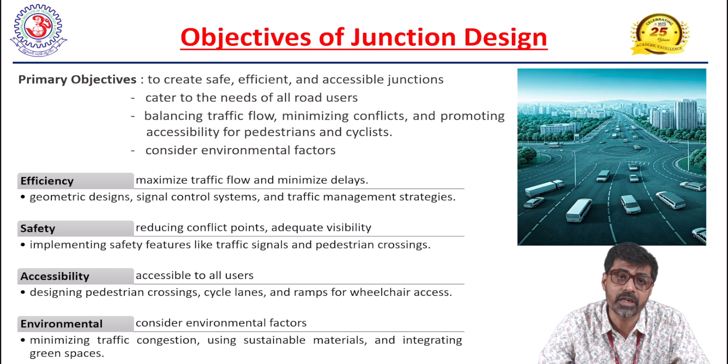And further, environmental consideration, where the design of the junction considers environmental factors such as minimization of traffic congestion, so that it leads to minimization of pollution emissions from vehicles, using suitable, sustainable material, and integration of green spaces within the road infrastructure. So these all help in achieving environmental sustainability while designing the overall road system.

Moving further, what are the different types of junctions? Junctions can be classified on the basis of grade, whether grade separated or at grade. It depends on whether we are separating the directional movements of vehicles at the same level or at various different levels.

At-grade junctions are where all roads intersect at the same level. That means all the directional vehicular movements are merging or meeting at a point at the same level, whereas grade-separated junctions involve an overpass or underpass to separate traffic at different levels. So here we are separating the traffic coming from different directions and going to different directions.

So what are the examples of at-grade junctions? At-grade junctions are crossroads, T-junctions, Y-junctions, and roundabouts. Whereas grade-separated junctions are divided into two components, which are flyovers and interchanges.

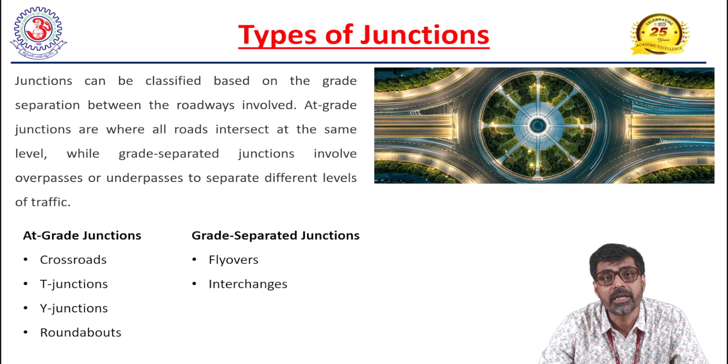Moving ahead, what is the junction design process? How can we design the junction? It involves various key steps, which start from data collection, then analyzing the data to understand the traffic pattern, which leads us to the geometric design and implementing appropriate safety features.

So it starts with the traffic survey and analysis, where we collect data through traffic volume studies, speed studies, traffic composition studies, and turning movement studies, and then analyze all this data to understand the existing traffic scenario on the site. Through this, we predict for the future, estimating what the traffic scenario will be. That helps us in decision making.

The second step is the selection of junction type. Once we analyze and understand the current scenario and the scenario in the upcoming future, we decide the junction type: which junction design we can implement on ground for the purpose of catering to the expected traffic flow.

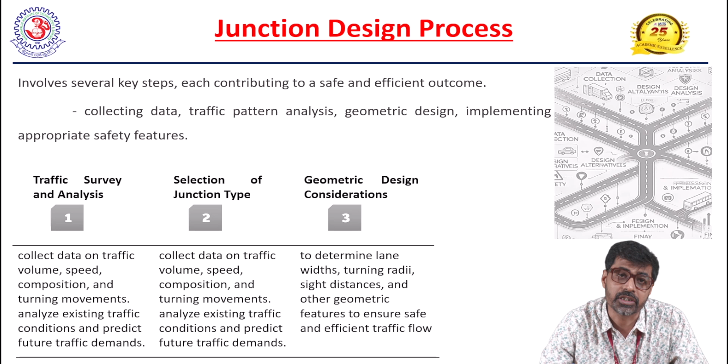Further, once we decide on the junction type, we are going to design the junction for the purpose of implementation on the ground through various junction design principles, such as the speed of the vehicle, the radius of the curve, the width of the road or number of lanes required, sight distance required, or any other geometric features which are required for the design of the junction. So we are going to consider all these things.

Further, talking about the principles of junction design, they are crucial for achieving the desired outcome of safe and efficient traffic flow. So in order to have safe and efficient traffic flow, it is very important to follow the principles of junction design to guide the design process, to minimize the conflict points, ensure the adequacy of the visibility of the driver, and control the vehicle speed.

In order to identify the right speed at the junction for all kinds of vehicles, whether it is a large vehicle, a small vehicle, a private vehicle, a public vehicle, a motorized vehicle or a non-motorized vehicle, to control the vehicle or to identify the minimum speed at the junction, as well as to make sure of the safety and security of the road users at the junction, we need to follow the various principles of junction design.

So in order to make sure that the design will meet the requirements, we have to first take care of the visibility of the driver, so the design should provide clear sight distance or a clear line of sight at the junction.

Further, capacity should be sufficient to handle the peak traffic at that particular junction. The peak traffic means the traffic at the peak hours, when the maximum traffic in 24 hours is expected to enter the junction. And that leads us to decide the number of lanes and the queue length we are expecting at the junction.

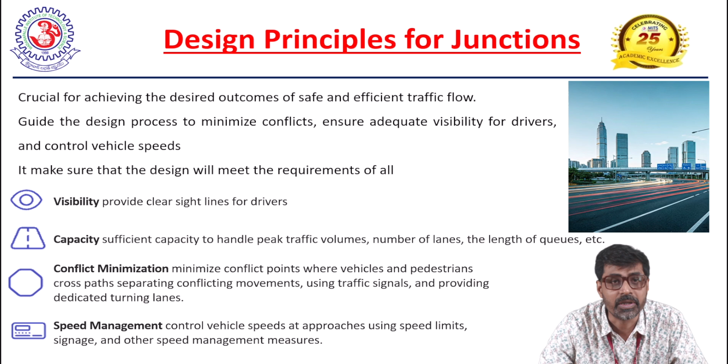So different directional traffic merges and diverges from and to the junction, and vehicles of different speeds are entering the junction and merging with other vehicles. So various components are involved. So speed management is very important to make sure that for all vehicles, regardless of shape, size, or maximum speed, the speed should be similar, so that they can enter and exit comfortably from the junction or within the junction.

Talking about various types of junction, let us discuss the roundabout and how the design of a roundabout can be done. So theoretically we'll speak about it. A roundabout is an at-grade junction that uses a central island. As we see in the image, which has been taken from the internet, there is a four-arm junction which has a roundabout, a circular central island, at the center, which allows the traffic entering from all directions to take turns or to take various directions. So it is a type of at-grade junction that uses a central island and a circular path for traffic flow.

Given its safety benefits and ability to improve traffic flow, it is a more efficient and safer alternative to traditional intersections, especially in areas with high traffic volume. So this is the safest way of implementing traffic management at a junction where the traffic volumes are significantly higher and need a basic level of intervention, in order to allow the traffic to enter and exit the junction safely.

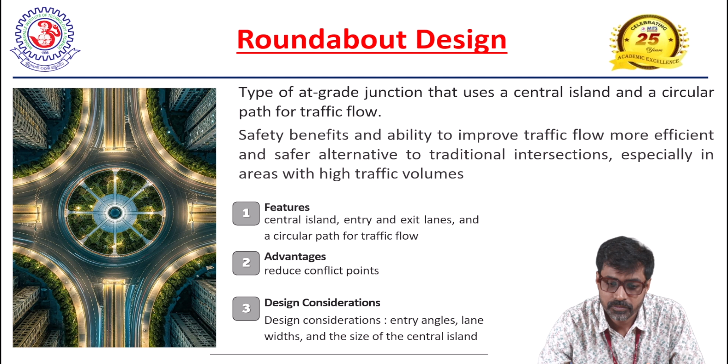Moving towards the next type of junction design, which is signalized intersection design, where we have significantly more traffic at the junction than at roundabouts. So we need to control the traffic by stopping the influx of vehicles from three directions or one direction, and allowing the entry or exit of vehicles from the other direction. In order to achieve the desired outcome of safe and efficient traffic flow, we go for the signalized intersection design, which helps in guiding vehicles to enter and exit the junction. And it is also helpful in minimizing the conflict points.

Roundabouts also help us to minimize the conflict points, but they have their own limitation. They do not control the movement of the vehicle; they just direct the vehicle to enter and exit. But in the signalized intersection, it controls the vehicle movement. It does not allow a vehicle to enter when a vehicle from another direction is already entering the junction. So when the traffic is significantly high and we need to control the entry and exit of vehicles, we require the signalized intersection design.

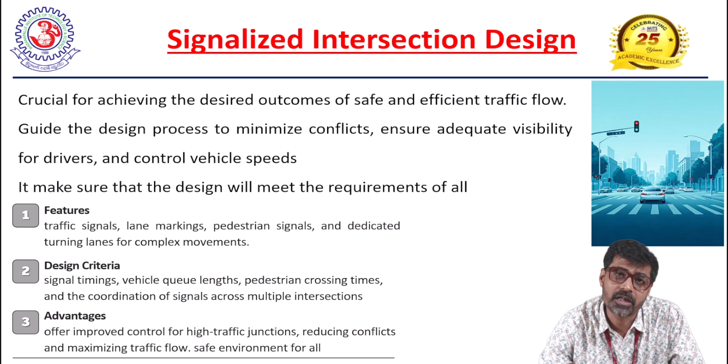Okay, what are the advantages of this kind of junction? It offers improved control for high traffic junctions, as we already discussed, and it helps reduce the conflict points within the junction and maximize the traffic flow. Further, it has its own environmental benefit by reducing emissions, because in a free or uncontrolled junction there will be more pollution emission as compared to a controlled or signalized junction.

Moving further, consideration for pedestrians and cyclists. This component is very important, as generally during the design of a junction, whether it is a roundabout or a signalized intersection, we somewhere forget or give less priority to pedestrians and non-motorized users, which in this case are cyclists. It is very important to give priority to them also, because they need to cross the road, cross the junction, and travel on the same infrastructure. If we do not consider their movement, this will lead pedestrians and cyclists to forcefully enter into the motorized traffic. And because of various reasons, such as speed variations, size variations and many other factors, it will create risk for pedestrians and cyclists.

So while designing the junction, we need to consider the requirements of pedestrians as well as cyclists. What are those requirements? One is safety, in terms of pedestrian crossings and providing signals for pedestrians. In heavy traffic and heavy pedestrian locations, we require pedestrian signals where the traffic can stop while pedestrians are crossing the junction. A dedicated lane for cycles and refuge areas for cyclists provide a safer environment for them. Further, the second is design integration.

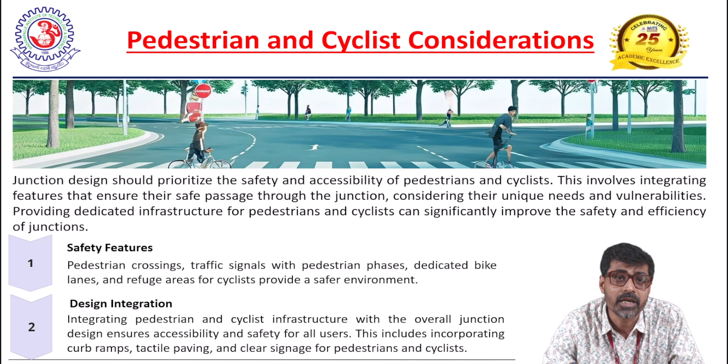While designing the junction, as we discussed, we need to consider the cyclist as well as pedestrian movement along with the traffic movement. So this is also a very important component while considering the design of the junction.

Moving ahead, what are the various challenges a junction designer can face while designing the junction? If we classify these challenges, there are four basic classifications of the challenges which a junction designer generally faces. One is the space constraint, second is the traffic congestion, third one is the mixed vehicle condition, which in the Indian traffic scenario is very common, where we have a mixed traffic condition, and the pedestrian and cyclist movement along with the motorized movement.

So the challenges the designer is facing are the space constraint, in terms of limited space in urban areas, availability of a very limited amount of space for the design of junction for all types of vehicle, for all speeds of vehicle. And because in the Indian traffic conditions we have a mixed traffic condition, where all types of vehicle are moving in the same space or the same infrastructure, we need to design the junction to cater to the requirement of all these types of vehicles or mixed traffic conditions.

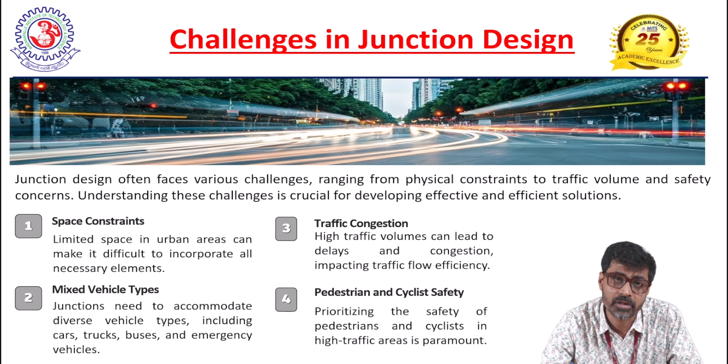Third one is the traffic congestion, because of the variation in the speed of all the modes of traffic moving on the road or junction. It creates traffic congestion. So the designer needs to consider the traffic congestion, as well as the safety for the pedestrian and non-motorized traffic movement. That is a big challenge for the designer.

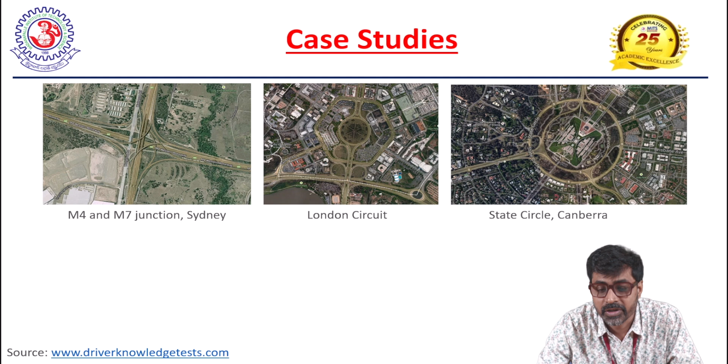So these are a few case examples around the world which we can see in this slide. The first one is the M4 and M7 junction of Sydney, where the junction has been designed with a dedicated lane for all the directional traffic. The second one is the London circuit, where the traffic comes to a central location and then diverges. Further, the State Circle of Canberra, and the Monash East Link intersection of Melbourne, again a separate lane for the directional traffic.

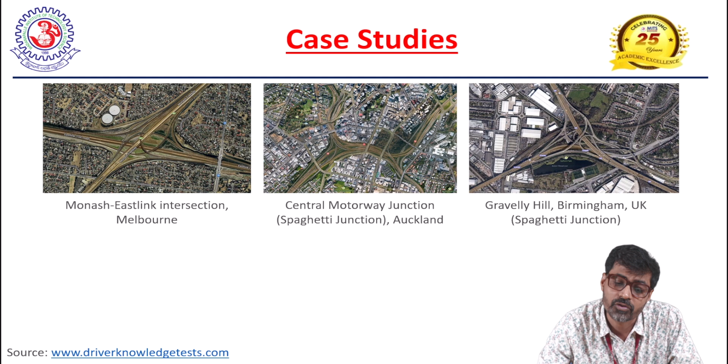Central Motorway Junction, also called Spaghetti Junction, situated in Auckland, where there is the integration of two junctions, designed in such a manner that the two different junctions separated apart now act as one junction. Further, Gravelly Hill, Birmingham in UK, again allowing the different directional traffic to move in separate lanes. New Jersey Turnpike, Eastern and Western Spur, New Jersey, USA, and Newark Airport Interchange, New Jersey, USA.

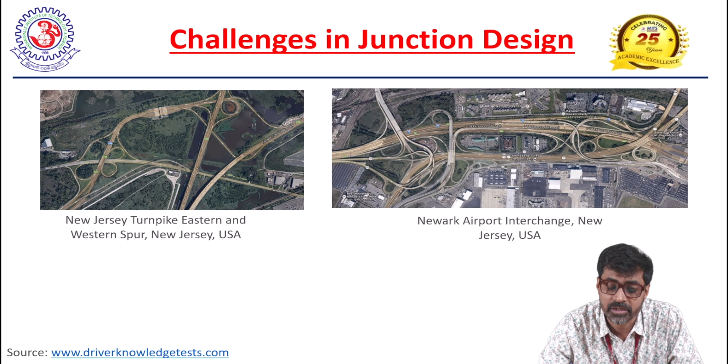Now talking about the various trends existing or expected in future that can affect junction design. With upcoming design technology for junctions, like smart traffic signals, real-time control of traffic will be possible with sensor-based traffic signals, which can detect the movement of the traffic and accordingly control the traffic at the signal.

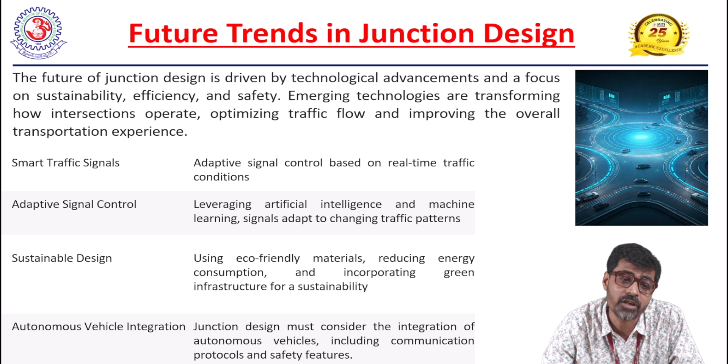Adaptive traffic signal control, as I just discussed: with the help of sensor-based technology and AI/ML technology nowadays, traffic control will be possible and adaptive traffic signals can be installed. Sustainable design will be possible with eco-friendly material and less energy consumption for traffic control. And with the integration of autonomous vehicles, there is a future need for change in junction design, which is also an important component.

Finally, concluding this session, there are four major components of junction design. One is traffic management: in the Indian condition we have mixed traffic, so we need to manage the traffic regardless of size or speed. Secondly, accessibility for all, whether motorized vehicle, non-motorized vehicle or pedestrian. Safety requirement for all, whether any kind of vehicle or pedestrians. And environmental sustainability, considering the benefit for the environment.

So with this, we are ending our session here. Thank you for your focus on this lecture. In the upcoming lecture we are going to discuss the design of the junction, how we can design the junction, and we will see various problems in the design of the junction.